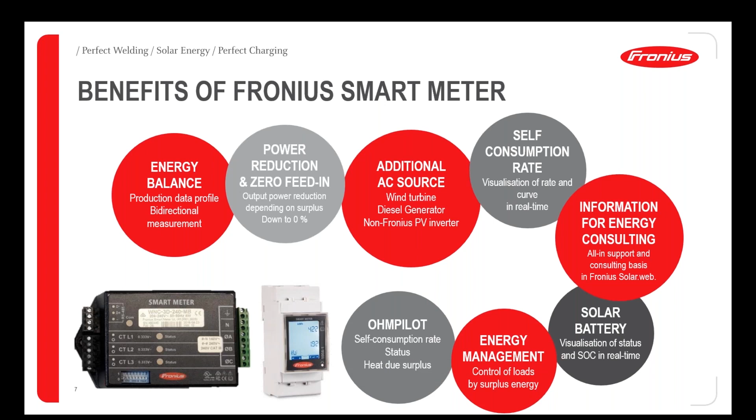We obviously need to have the smart meter installed to control a battery, so to control the charging and discharging when you have surplus energy or you have a deficit and you need to discharge that battery. Similarly for energy management and Ohmpilot, so switching on various different loads when you have your surplus energy instead of sending it back to the grid. So all of these functions are available using one of our smart meters.

What I'd like to ask now is who's actually using the smart meter already, and what are your main reasons for using smart meters? So we have a quick poll question here. So what do you use the Fronius smart meter for? And if you could click as many answers as are relevant for you. Are you using the smart meter for energy usage information to see what's happening within the property? Are you using the meter for export limitation, battery management, control of loads within the site, or so far have you not used the smart meter? You can just enter your answers and hit the submit button at the bottom of the screen. That would be brilliant.

Let's have a look at the results. So we can see a good mix here. So a lot of people are already using it purely for the information benefits, the usage of energy within your site. Very useful, simple feature. We recommend having the smart meter installed in pretty much every installation so that you can get that idea of your energy consumption. Export limitation, unsurprisingly, is the most common usage for the smart meter.

Traditionally, the smart meters were installed just for that purpose, but now with all the additional load management technology that we can provide, we're seeing more of a move towards having the battery management and the intelligent load management installed. Obviously, with our new Gen 24 inverters, we're expecting to see the battery management being a much more important aspect of smart meter installations.

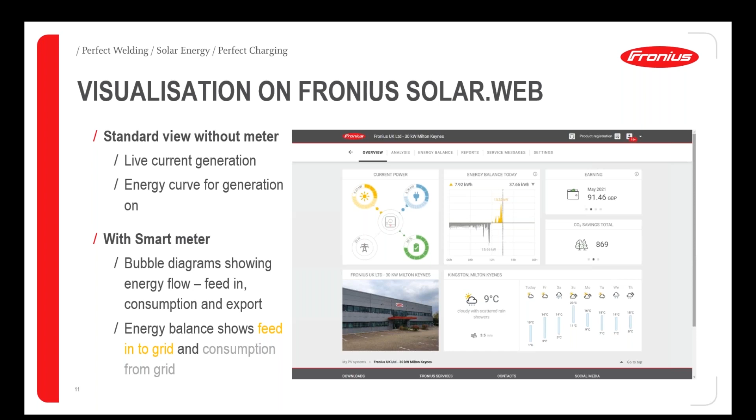You can try this with various different size batteries, and as a result, you'll be able to work out the best size for you. This is great information for an installer who can then go back to their customer and potentially upsell the battery solution and show them the real benefit to them individually. So it's a really nice, simple tool to use.

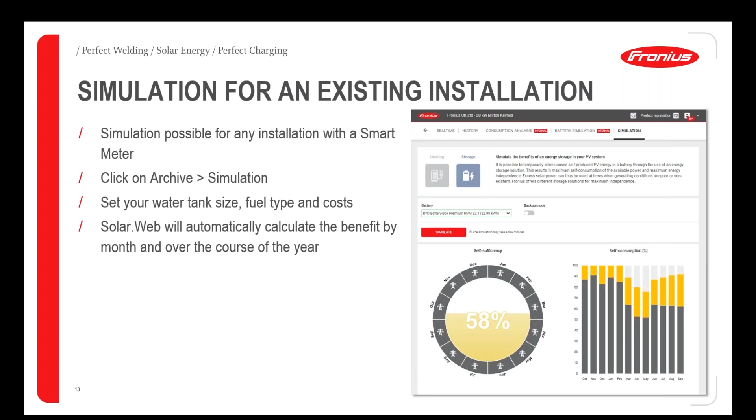Once you have that battery or Ohmpilot installed, you're then able to see all of your information for all those different devices in one place. And of course, the key to this is having that smart meter in place, so that you're able to control the charge of the battery early in the morning, or the hot water heating when you want to get that water up to a higher temperature. It all comes down to the key component, which is the smart meter.

Over longer periods of time, again, you can pick up trends. You can see the difference between the summer months and the winter months. You can see when you're using additional hot water, when you're using the battery to its best capacity, and again, all requiring that smart meter to provide the additional information.

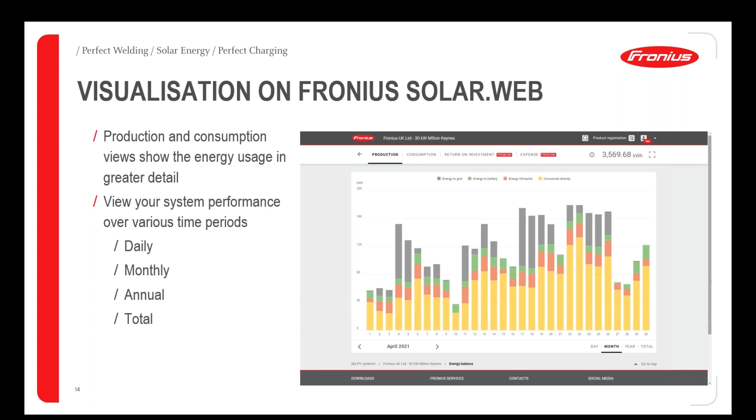So we've had a look at the visualization benefits. Let's have a look at those control benefits as well for controlling the energy management and power reduction. So with a typical PV system, you may have an inverter, you may have a number of loads on site, you may have a battery, you may have an Ohmpilot. You also need to have that smart meter.

And what the system's always trying to do is to make sure that any surplus energy is diverted to the Ohmpilot or the battery. Obviously, when that device reaches full capacity, the inverter starts to fire up at full power, we might see some energy going back to the grid. And in order to provide export limitation to stop energy going back to the grid, the smart meter values are simply used to throttle back the inverter output. So what we see is a reduction in the output of the inverter.

So obviously, the bigger the battery or using bigger loads on site means that you don't have to throttle back the inverter so much. So adding all these extra devices, the smart loads, the Ohmpilot, means that your inverter can work at full power rather than having to throttle back under export limit conditions.

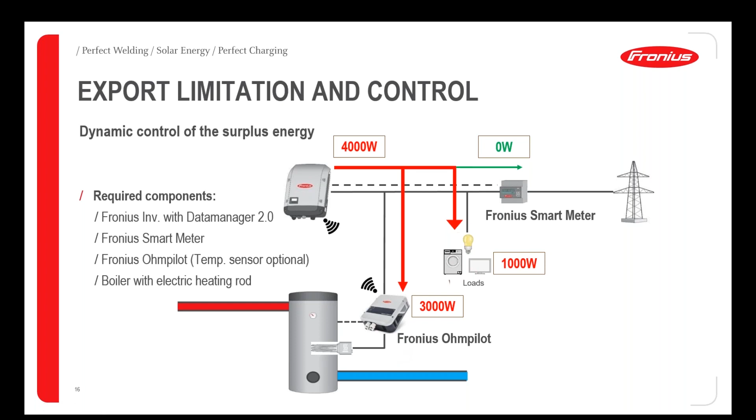So let's look at the smart meter itself. We've had a look at the functionality and the impact it has on the PV system. Let's have a look at the individual devices. Some of you have been installing smart meters already and may be familiar with the UL240 meter. So up until now, this has been the key meter for the single phase market.

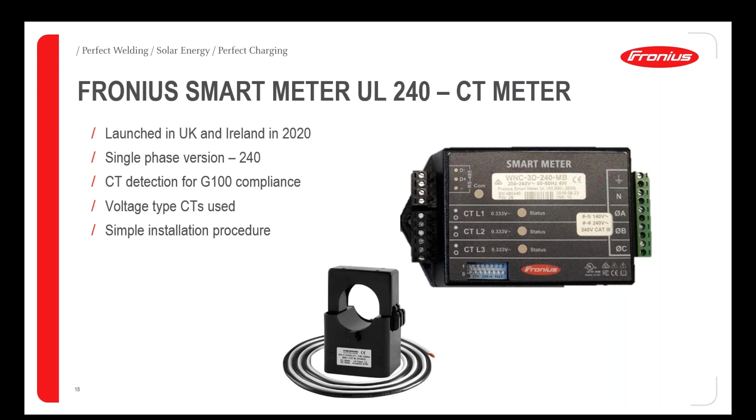And this is a CT meter, so it has this current transformer, which clamps around the incoming mains cable, measures the current, and then tells us which direction energy is flowing, and also tells us the amount of energy that's being used on site. So it's a simple meter to install, but it does have to take its own enclosure. You do have to manage that CT, get it secure around the cables. So there is potential for either getting the CT back to front, having it loose, maybe making a mistake with the wiring.

The advantage of the new TS-100 meter is it is a direct connect meter. It doesn't need a CT, and it fits nice and neatly within a distribution board. So it's a DIN rail mounted device, and it takes up just 2 DIN rail slots. So as you see next to these MCBs, it fits securely within the enclosure. And without having a CT, it means that we simply connect in from the main switch into the smart meter and then out to the loads.

It's a very simple solution as long as you have the space within your enclosure. You can obviously install it in a separate box next to your enclosure. That's always an option. But if you do have difficulties with space, you've always still got the option of the CT meter.

The Smart Meter TS-100 has other advantages. It is rated to 100 amps, so it's suitable for almost all UK and Irish domestic installations, and it has a terminal cross-sectional area of 25 mil. So that means it's designed to be used with most residential incoming connections. It's also important to note that this meter is significantly cheaper than the CT meters. So there's a significant cost benefit by using this meter rather than the CT meter, as well as potential easier installation.

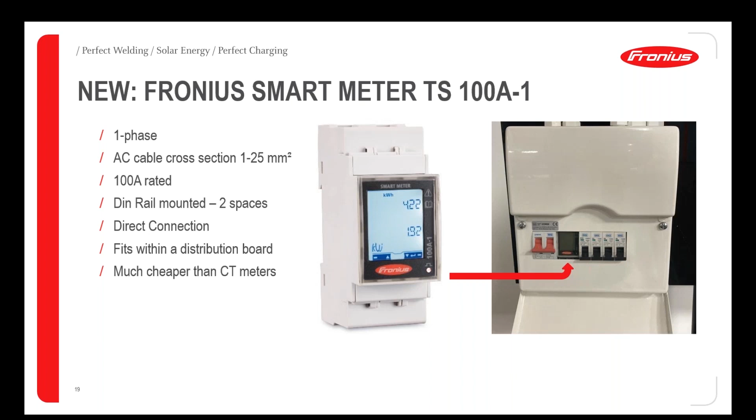So let's have a look at the installation for the meter. Very simply, we connect the supply phase cable, the live cable, into terminal 1 and then out to the loads from terminal 2. The neutral connection fits down into the terminal on the bottom of the device here, and we have our data connection here. So we have a three core cable going to our data manager. We need data plus, data minus, and ground.

And if you have a Gen24 inverter, it's a similar process. It's just that we use the terms Modbus 0 plus and minus and ground at the bottom, but very similar installation process. And also on the device, we have a termination resistor, which is enabled by just linking between terminals 3 and 5, and that switches on the termination resistor. So for the last device in the line, which is probably going to be this smart meter, just make sure that you've linked out between terminals 3 and 5.

There's no CTs to set up. The Modbus address is set automatically to 1, so there's very little programming to do with this new smart meter. It's simply a case of physical installation and then activating that from the inverter.

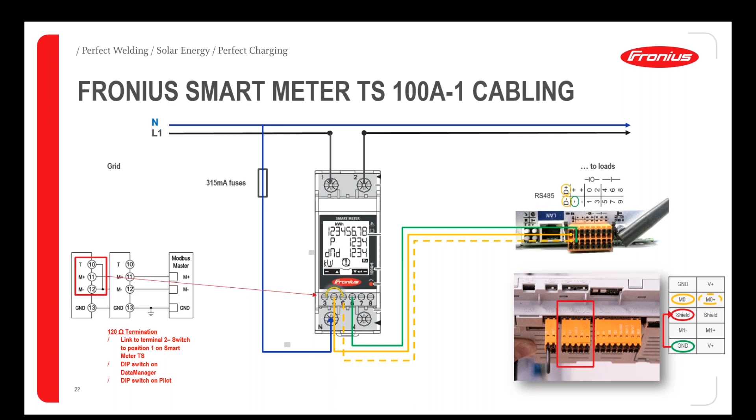So within the inverter, we then need to go to our data manager or our Gen 24 inverter, connect as you would to commission a new system in Solar.web, and we'll be using our technician wizard to detect the smart meter and incorporate that into our Solar.web system.

Before we start that, it's very important to have a look at the software version of your data manager. This is a new smart meter, so we need to make sure that we're on the latest firmware version for your data manager. You can always check that from the little information button at the top of the screen. It will show the software version, and if that's below 3.16, we'd recommend you click on the search for firmware updates and automatically update your firmware to the latest version. Once you've done that, you'll be able to detect the smart meter and use the system.

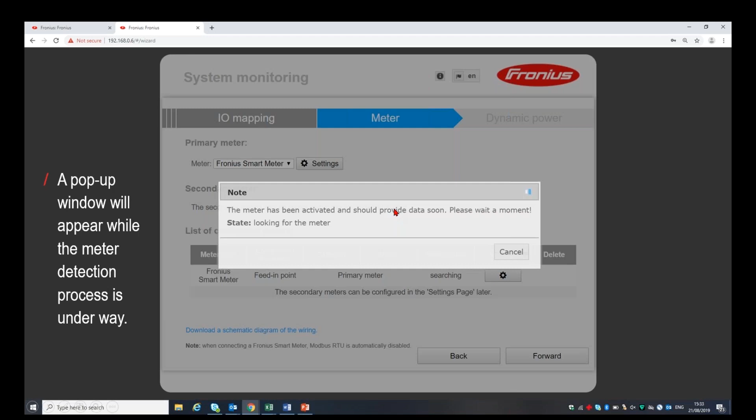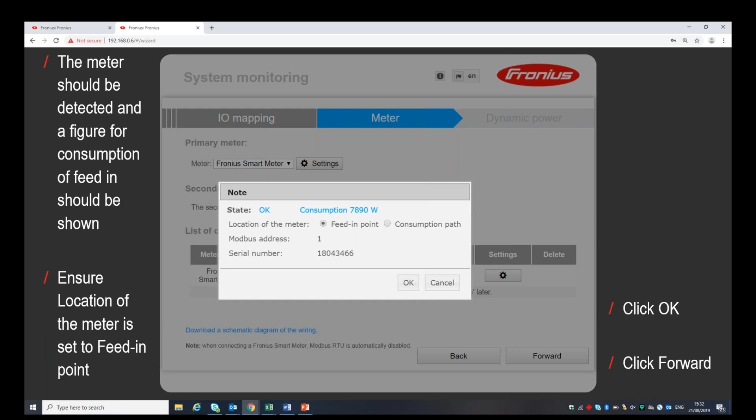So let's click on the technician wizard and we'll go through the process. A number of the pages are very similar on the technician wizard to the Solar.web wizard until you get to the meter setup page. The first thing you want to do is to click on the meter drop-down and choose your Fronius Smart Meter. Once you've done that, click on Settings. The device will now search for that smart meter, and hopefully you should see the status is okay, and you'll see a consumption reading for that smart meter. Make sure that it's set for the feed-in point. This just means that the meter is located where you're potentially feeding energy back to the grid.

And then the next page is to go to the dynamic power reduction. So as a standard, we allow all energy to go back to the grid. There's no limit on power export. We can change that to the limit for the entire system. We can set the power of the PV system, so that's for the array up on the roof, and then the maximum amount of energy that can go back to the grid. So typically for a single phase system under G98, we'll set that to 3,680 watts.

Once you've done that, click forward, and you'll go back to the main overview page on your data manager. You'll now be able to see the power from your inverter, and you'll also see the consumption from the grid or potentially the export to the grid. So it's a fairly simple process. If you've got an existing system on Solar.web, you simply go to that technician wizard page, run through, and add the smart meter into your system.

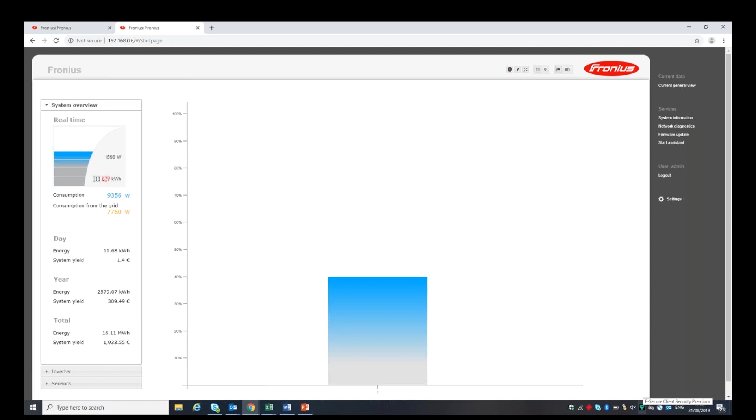You can also add multiple smart meters onto the same site. So this can be a benefit for customers who want to see certain loads. You might have very high loads for something like a pool pump or a heating system. You might have an EV charger that you want to integrate into your Solar.web page. Also, you can add your additional generators, so things like your wind turbine or some non-Fronius inverters. That can all be incorporated into Solar.web by adding additional smart meters. And of course, being a lower cost unit, the TS-100 makes a lot of sense to be used in line for each of those individual devices.

You can have up to 4 smart meters with a SnapINverter, and you can have up to 8 smart meters with the Gen 24s. The only caveat for that is if you have an Ohmpilot, that will take up one of the positions. So you'll have either 3 or 7 devices plus an Ohmpilot. But for most installs, you're going to be looking at up to 4 or up to 8 smart meters per site, which I'm sure is plenty for most people.

And the installation for multiple smart meters, again, is pretty simple. So as you saw before, we have the 2 data cables, the orange and the orange stripe, and we have the green ground cable. Now all we're doing is crimping those into a bootlace ferrule, connecting into the meter, and then going to the next meter in the system. So it's a very simple daisy chain through all of the devices, making sure that we have the termination resistor on the first and the last devices enabled.

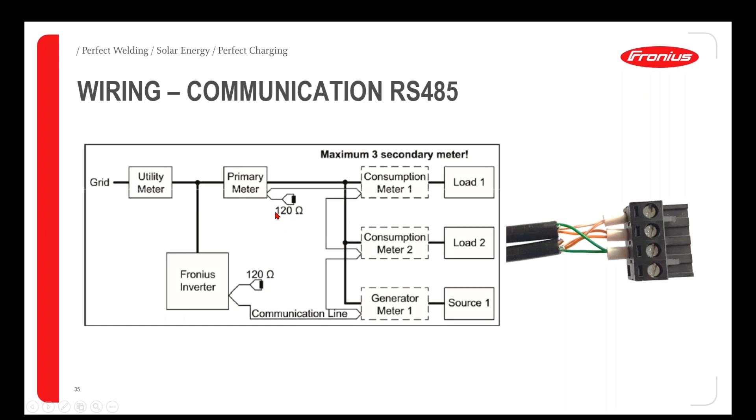We'll also then just need to change the Modbus address for each device. We need them all to have their unique address so that we can identify each meter individually. This is done through the meter display. The buttons on the screen of the meter are touch sensitive, hence the name TS. One press incrementally increases and decreases the numbers on screen, and a long press is the enter button

to accept a setting. So to change the Modbus address, all we need to do is set the password to 2633, follow through the menus to address, and then change the Modbus address for your additional meters. Make it maybe 2, 3, 4, up to 8. Click enter, and that will store the new Modbus address for your additional meters.

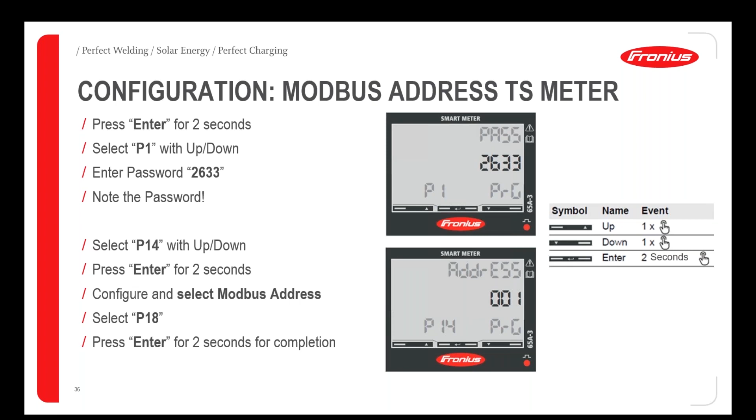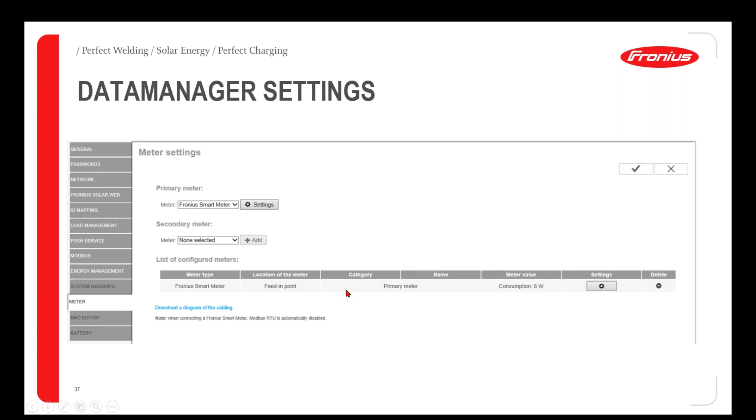Then back on our data manager settings, we simply add our secondary meter into the system, give it a name, and make sure we determine whether it's a generation meter or a load meter, a consumption meter. Once you've done that, Solar.web is automatically able to integrate that into the data, and you're able to see what's happening on your site with those additional loads or additional generators.

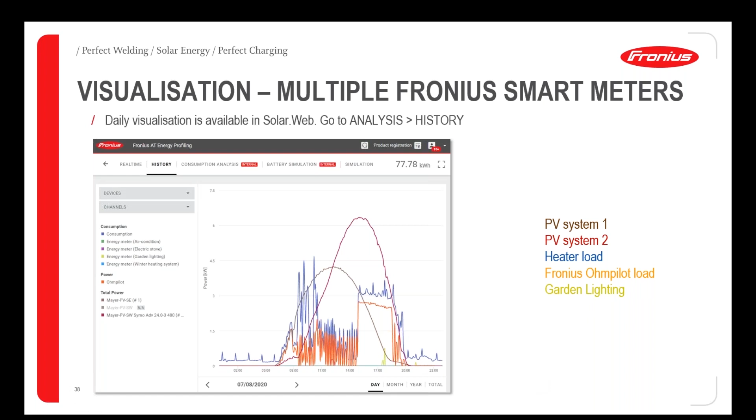And back on that main page of Solar.web as well, where we have the bubble diagram, we'll then see the wind turbine or other generator data incorporated into your main generation data. So all of your energy balances, the bubble diagrams, will now incorporate all of your additional generation information.

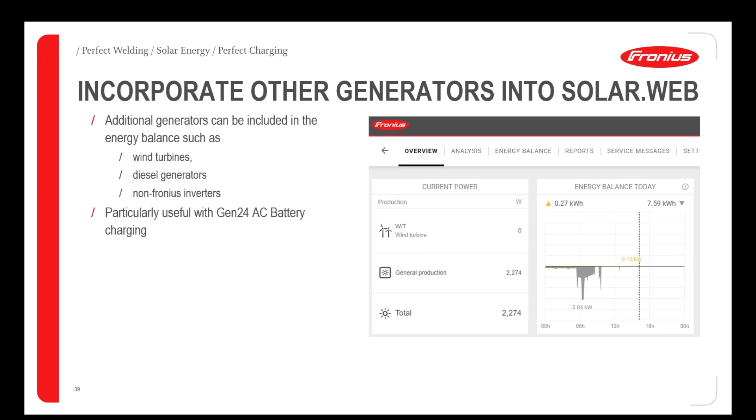Obviously we get a lot of questions on a daily basis on the smart meters. It is a bit of a complex subject and some people do struggle a little bit. As a result, we've put together our information brochure. This gives you a guide to the different smart meters available. It also talks through what sort of CTs you need for a CT meter and helps with a useful flow chart, which explains which meter you need for different types of projects.

So we'll make a copy of this available after the presentation. So please download it and have a look through. Open it up and have a look at the flowchart. When you're installing a new system, it's worth working through this flowchart to determine which smart meter to use.

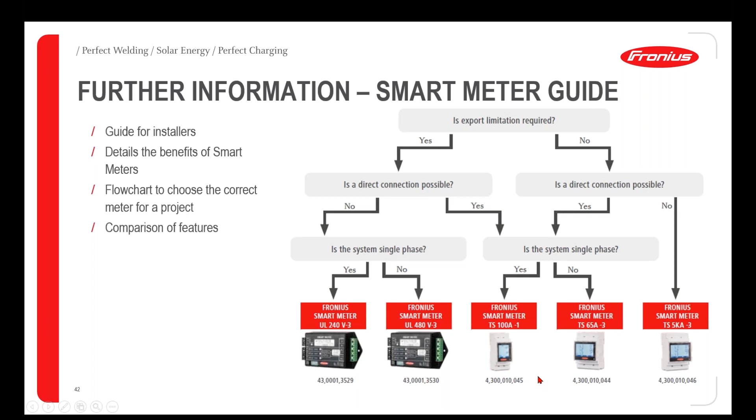But we're expecting to see most people move across to the TS-100. It's so much cheaper, it's a nice and tidy installation, it's simple to install, with less chance of making mistakes during the install process. So we're expecting to see the TS-100 becoming the primary choice for single phase installations.

On the back page of the brochure, you can also see a comparison of the features of all the different smart meters. Obviously, with the TS-100, there's no CTs required, but it's able to undertake all the different functions in a PV system, including export limitation. You can also see the dimensions of the device, the software that's required, and also the mounting methodology for that system. So please take a good look at that.

Hopefully it will answer most of the questions on smart meters. But if not, feel free to contact tech support. We'll be able to assist with any other questions you may have on smart meters.